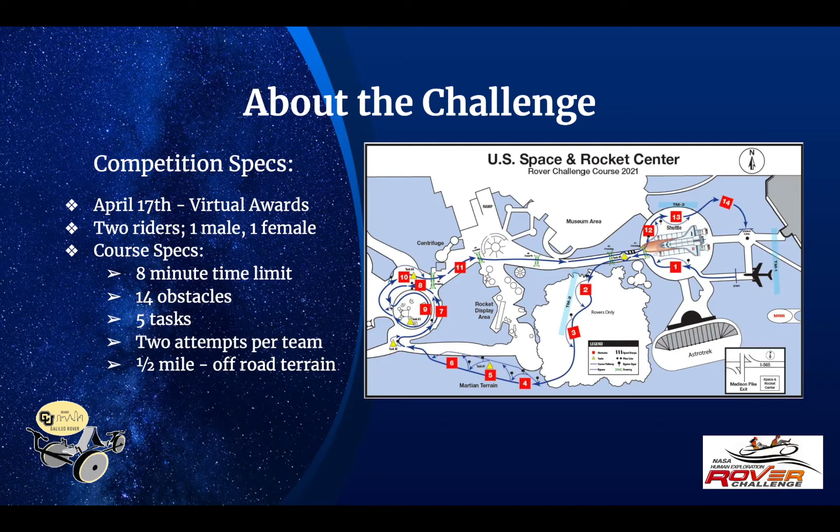The NASA Human Exploration Rover Challenge is an international competition that simulates extraterrestrial terrain through a series of challenges within an obstacle course. These challenges consist of various tasks that relate to those similar to astronauts and unmanned rovers. The objectives of the competition and the Galileo Rover project are to bring a first place win to CU Denver.

In order to meet the objective of being the overall winner, the rover, in collapsed form, must fit within a 5x5x5 volume box constraint. We must optimize the linear steering system and complete the assembly of the wheels.

The primary objective for the Galileo Rover steering design team was to ensure that the linear steering design adhered to Ackermann geometry, in which during a turn, the inner wheel is sent a smaller radii than the outer wheel, so as to avoid wheel slippage or skidding.

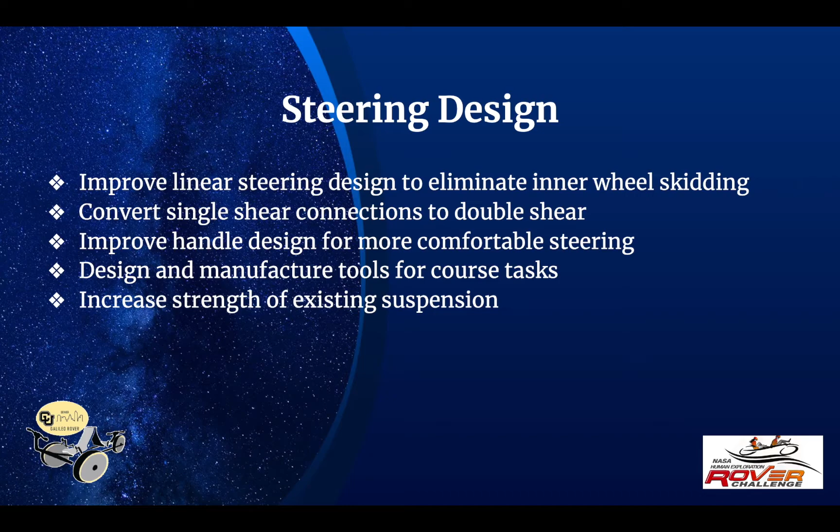There was also a priority to eliminate any single shear connections to improve stability, and a goal to redesign the handles to improve a more comfortable steering experience for the driver.

The steering design was formed on the basis of 2 parallelograms, offset linearly, with the base of the handles connecting them on each side. 2 tie rods were chosen to connect to the middle of the base of the top steering arm and extend diagonally to the wheel knuckles.

These were designed so that when the driver pushed the left handle forward, the right would go back, and angular directions would be sent through the tie rods to the wheels, with a smaller radius being sent to the right wheel. The attachments connecting the steering and suspension arms to the wheel knuckles were redesigned for double shear connections.

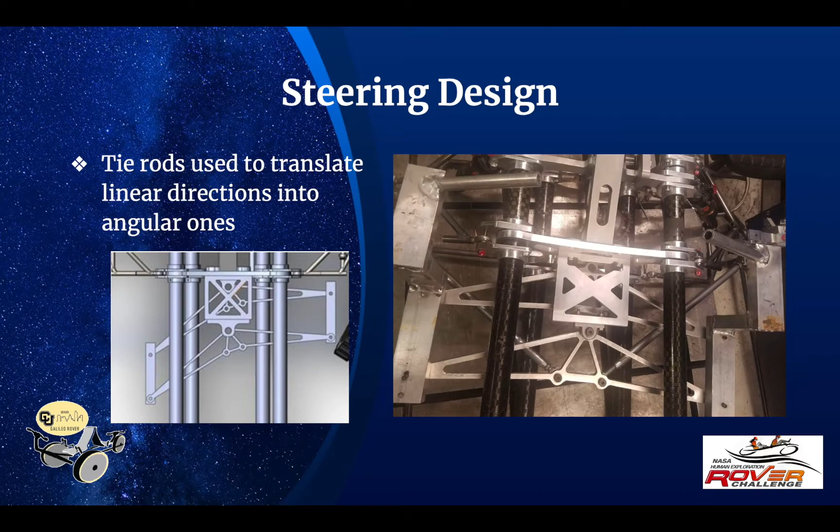By looking to improve the handle design, a 3-tier design was chosen. The design was made to connect the 2 steering arms linearly and then extrude up and in towards the driver. The handles underwent a few design alterations before the one in the picture was finalized.

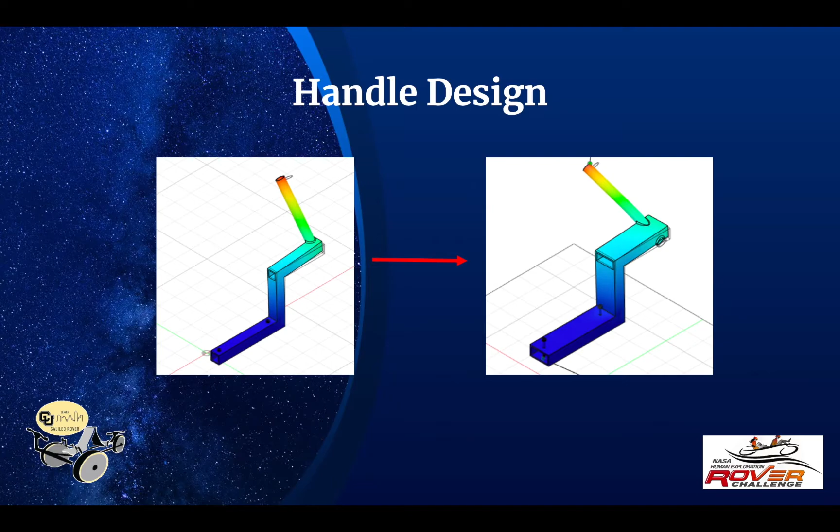The rules for the competition required the rover to climb 30-degree inclines through various obstacles. Using the recorded power output between the 2 riders and the weight of the loaded rover, we calculated how fast the rover could travel on a 30-degree surface based on power to weight ratio and vertical velocity.

We assumed that the riders could maximize power efficiency if they pedaled at an angular velocity of 70 RPM. The final drive should have allowed the riders to pedal at this speed in 1 gear, while the rover traveled at the calculated velocity. Based on these calculations, we decided that the final drive should be 2.2.

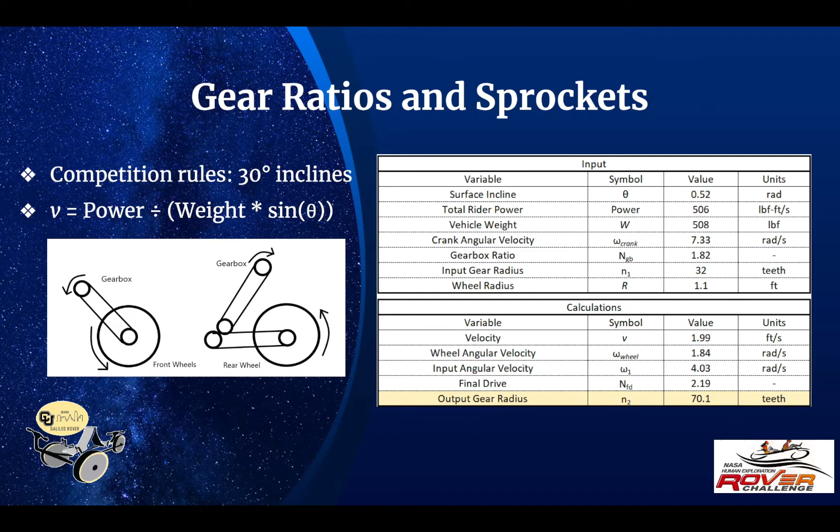One of the gearboxes had a 32-teeth sprocket attached, which would require a 70-teeth sprocket on the drive shaft to get the correct final drive.

Previous teams used sprockets that required a 9-spline and a 6-bolt fitment. The issue with this was that only 22-teeth sprockets were available for this fitment style.

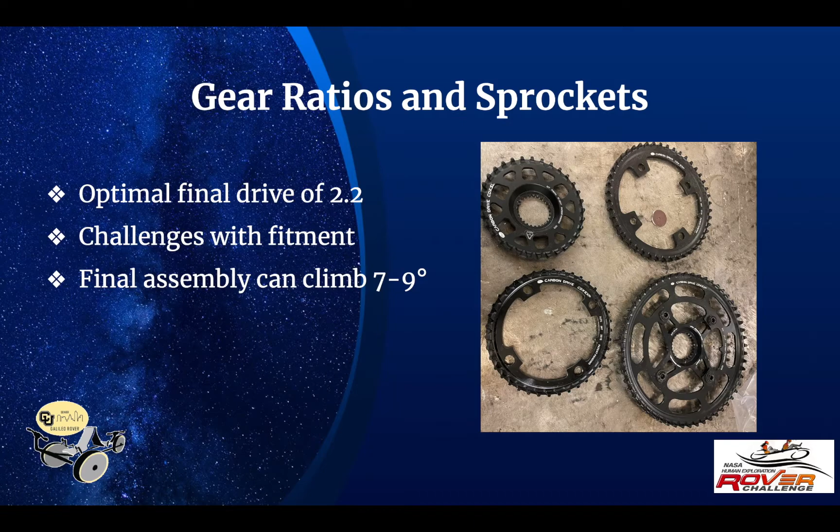The second gearbox required a 4-bolt fitment, and the smallest available sprockets had 39 teeth. There was a sprocket in the shop with these specifications, so it was installed on the gearbox. This set of sprockets limited the acceptable surface angle to about 7 to 9 degrees.

To reduce the weight of the rover, hollow aluminum pedal posts and hollow carbon fiber stringers were designed. Through simulation software such as Fusion 360 and SolidWorks, it was determined that the carbon fiber and aluminum 6061-T6 materials would yield lightweight parts with a safety factor of 3 while reducing the overall weight of the rover's frame.

Other components such as aluminum 6061-T6 bulkheads and carbon fiber torsion plates were designed with the same goal in mind, in order to provide structural support for the steering and suspension assemblies. The combination of these components created a frame strong enough to sustain 2 riders while reducing the weight of the rover.

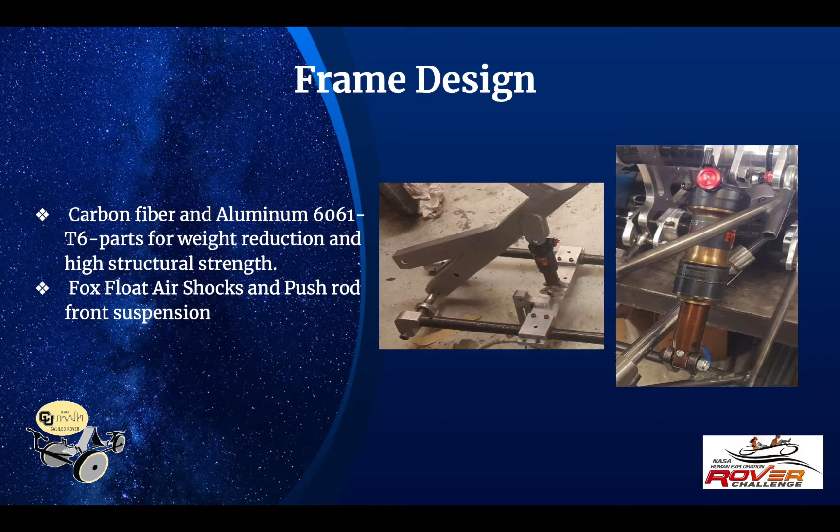A hinge folding mechanism on the pedal post was designed to allow the pedals and gearbox to be folded and locked on itself, reducing the size of the rover frame from 10 feet to 7.5 feet.

The rear suspension can also be folded into the frame of the rover or locked for the rover to be operational by using a spring-loaded latch pin.

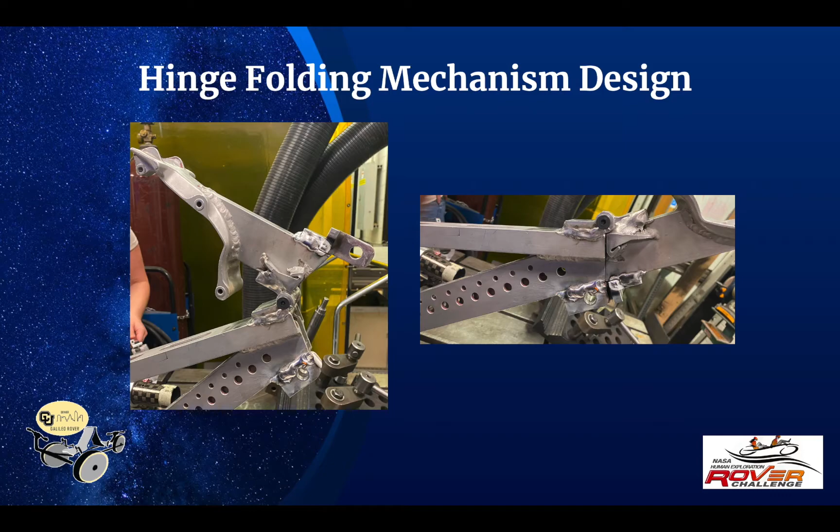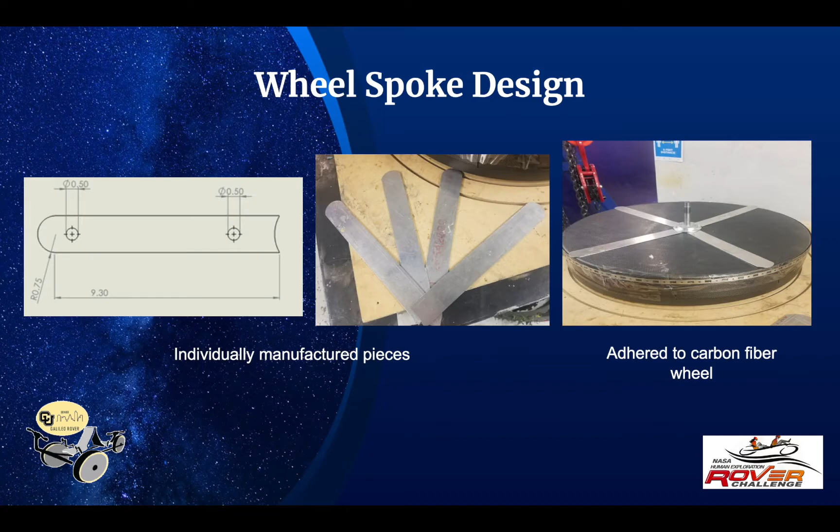The decision to add these strengthens the overall integrity of the wheel at the hub shaft and prevents possible oil canning and potential failure. The final wheel assembly can be seen on the right-hand side with the aluminum spokes added to the wheel along with the foam and outer rubber tread.

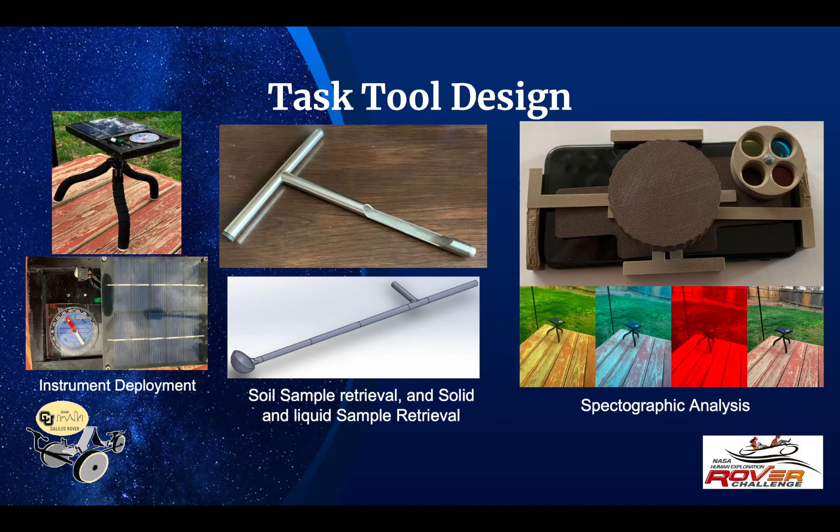Unfortunately, after final decision by the NASA staff, the competition was held virtually this year, with the option of video submission, in which Galileo did not meet this deadline.

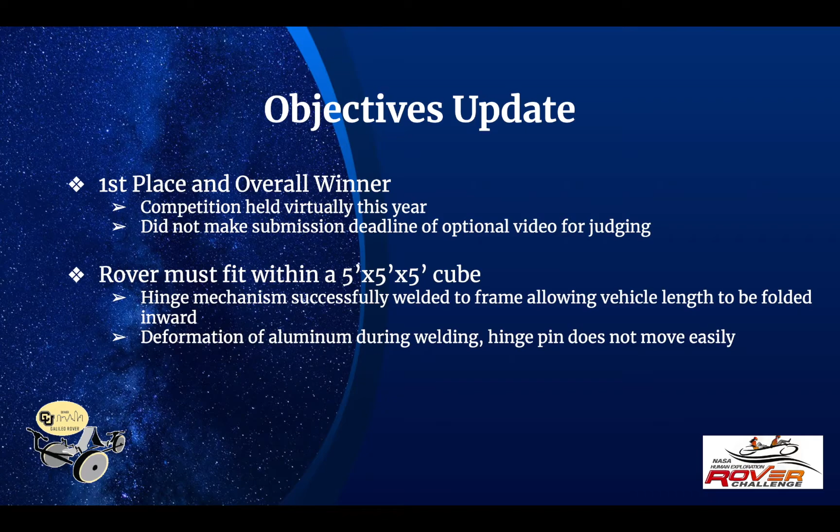Although that objective was not met, the team successfully welded the hinge mechanism, meeting the requirement of the rover fitting within the 5x5x5 box. Once the steering system was assembled with the knuckles and axle, the tie rods were able to successfully translate the linear motions directed from the handles into angular directions for the wheels.

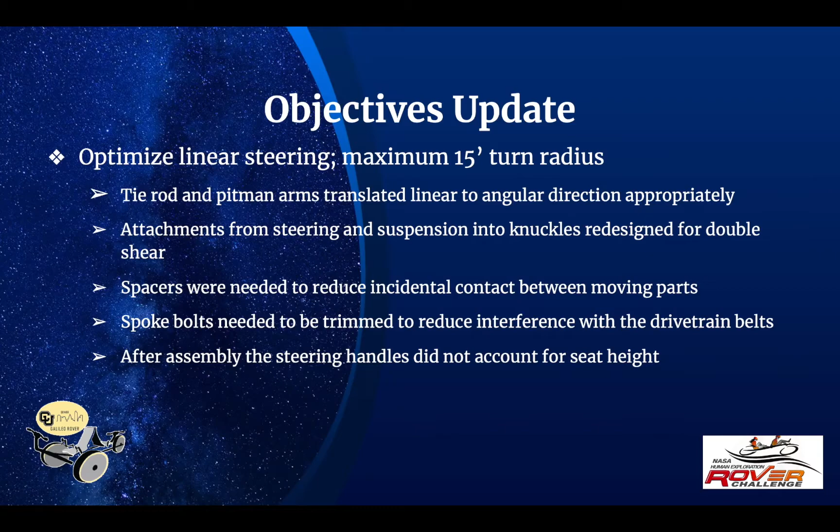Due to time constraints, further testing was not completed to ensure that the steering design prevents skidding while turning the vehicle. As for the handles, after welding and assembly, it was realized that they sat much lower than anticipated. As such, they encroached on the driver's seat and hampered the ability to drive.

Although various pieces of the rover needed final touches, the vehicle is completely assembled, therefore completing our team's internal objective. For the parts that are left to be completed, we believe that the analysis we did shows the final product would allow the rover to be fully functional.